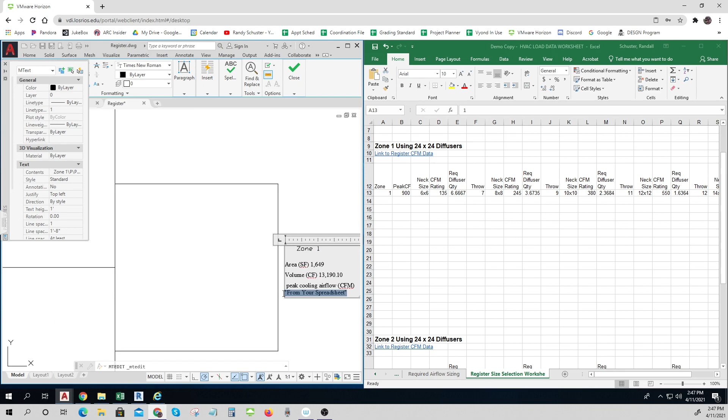Let's say I need 900 CFM in here. I know that's not quite right, not according to our calculations, but you'll have to put in your number properly. So with 900, if I use a 6x6 register, I'll get 135 per unit. I'll need 6.7, so I'll need 7 of those, and they'll have a throw of 7 feet.

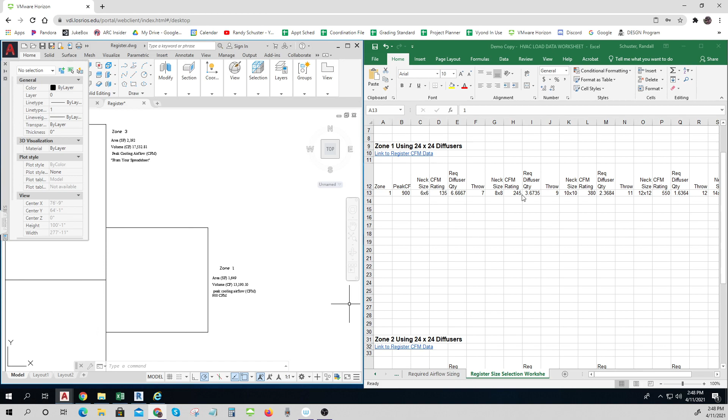But maybe I want to try to get away with fewer. If I did 4 of them, I'd have a little bit more air than I needed. With an 8x8 neck, each one is 245, and I need 3.6, so if I put 4 of them in there it wouldn't be too bad, and each one has a throw of 9 feet.

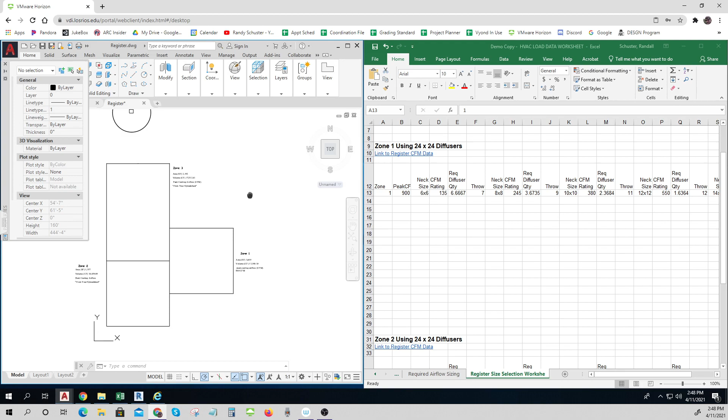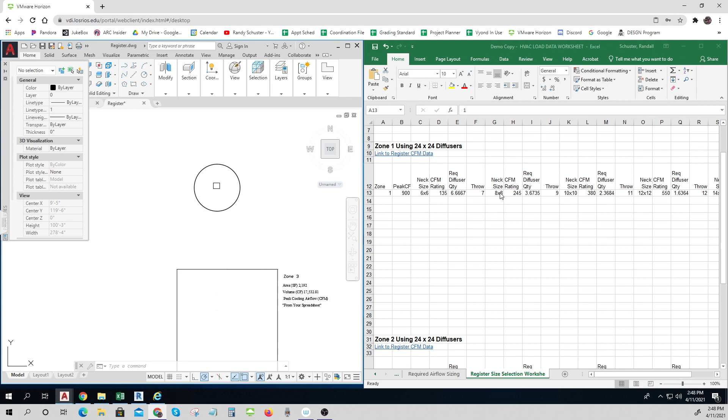So let's see what that'll look like. Here's my register. If I do 4 of those, my throw is 9 feet, and this one has a radius of 12, so I have to make it 9 feet. There, that sort of estimates my 8x8. So I'm going to try it and see how it looks.

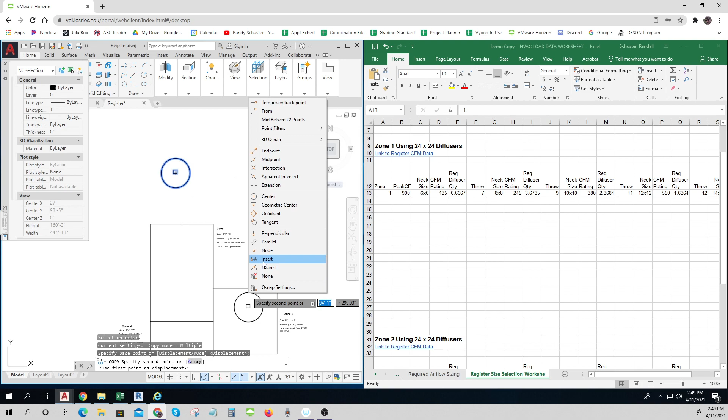I'm going to copy that and I have to have my OSNAP set properly. I need my quadrant on, so I want my quadrant, say, on my midpoint. I have to get my OSNAP set properly here. I'm going to want midpoint, I don't need center, and quadrant, intersection, perpendicular. That'll be a good one.

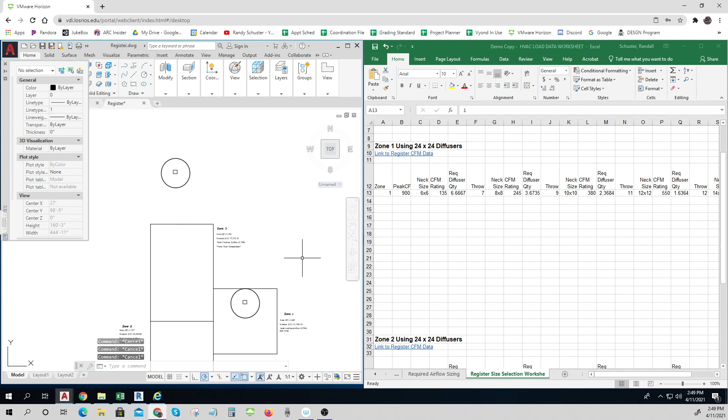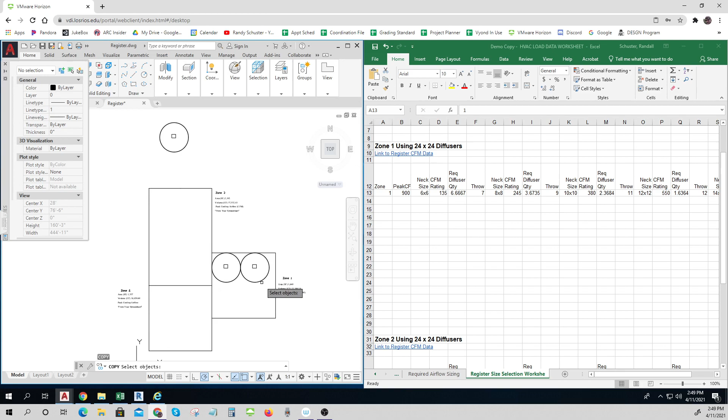I'm going to move this so the quadrant comes over to here. There we go, and supposedly with 4 of those I can get it to work. So I'll copy that one, put the quadrant to the quadrant, and copy those. Put the quadrant... oh no, those aren't quite doing it.

Maybe I'd be better off with 6 or 7 of these with a throw. You see, there's a lot of area here that isn't really getting good coverage. That's not terrible, I'm getting enough air, it'll spread around, but let's see if I can come up with a better solution.

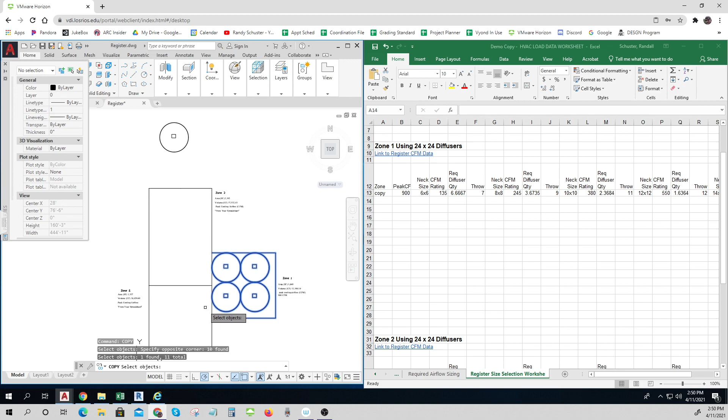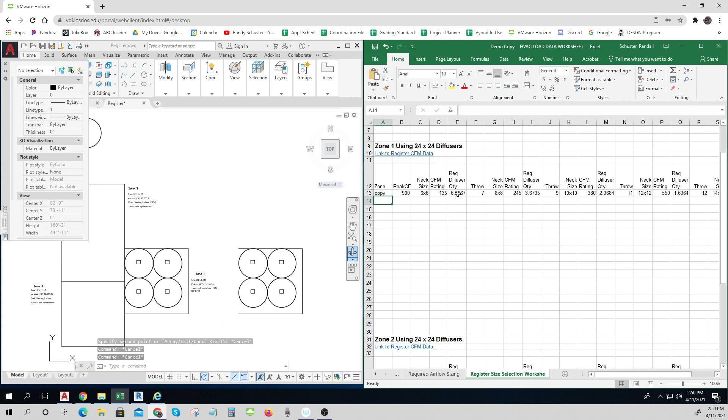So I'm going to make a copy of that for my zone 1 solution, and just see if I can do better than that. Another choice would be 6 or 7 of these with the 6x6, and they've got a throw of 7.

So if I change these all to... I'm going to change this one now to a throw of 7 feet, 7 feet. Get that to move and see if I can get that to line up.

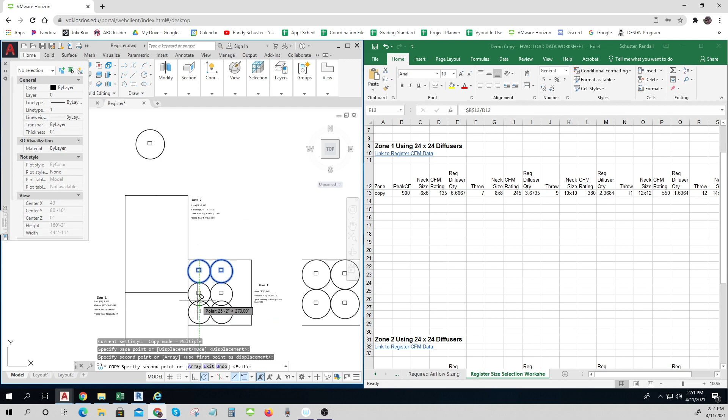Well, that's doing a little bit better. So I might need a few extras. I'm getting a little bit of overlap and a little bit of coverage.

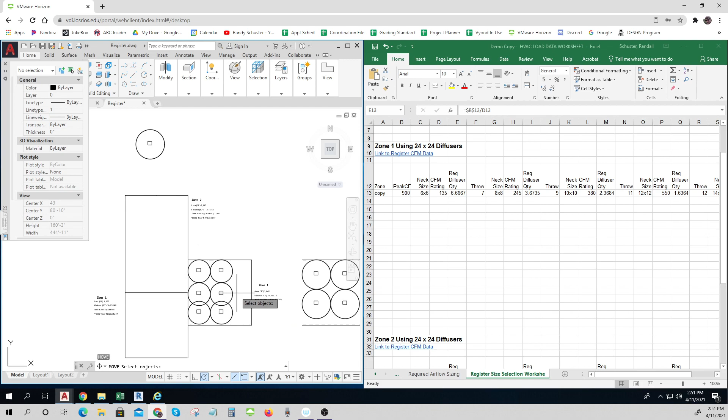So you can see now I'm just trying to come up with my best solution. And then 7 would give me one more, but I'm still not nailing it, so I may be going the wrong way. So that's with 6, I could do 7 or 8.

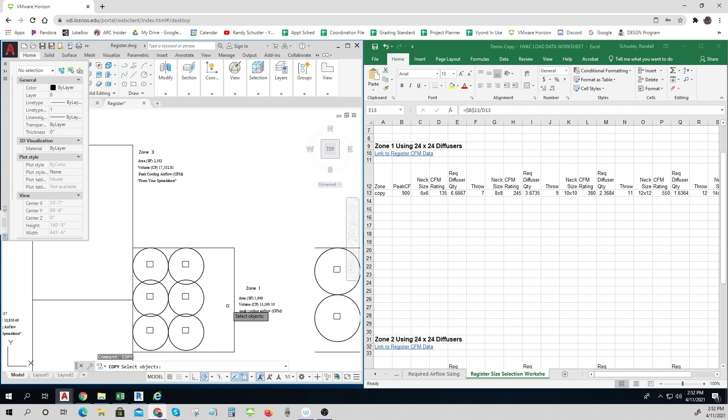You see, I'm not being super precise. Air does move around, so I don't have to be perfect with this, but that's not too bad, and I'd be doing a little bit better, right? So those ones are up. But let's see what happens now — there's another one that I could try.

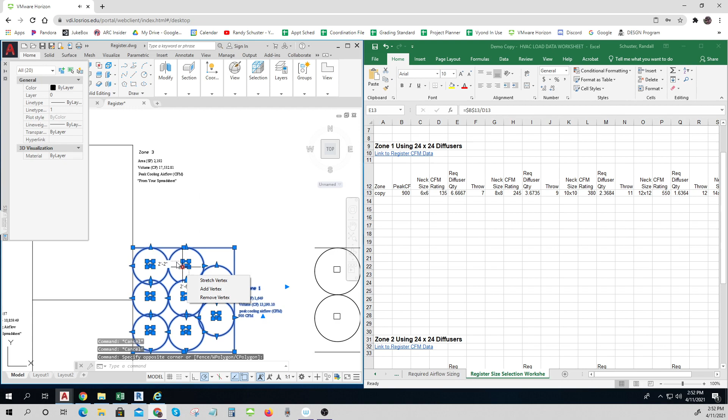So this is what you're going to do. You're going to set how many registers and about where they go.

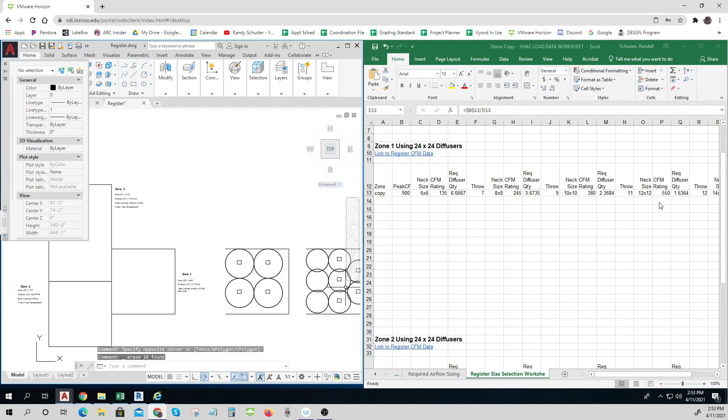Now let me get rid of these again, and I'll try what happens if I go the other way. A 550 has a throw of 12, and I need 1.6, or a 14 has a 750, and I'd still need 2 of them, and it's got a throw of 15. Let me try that.

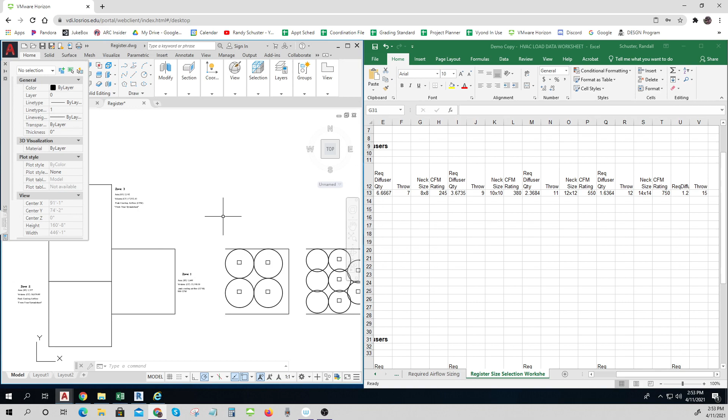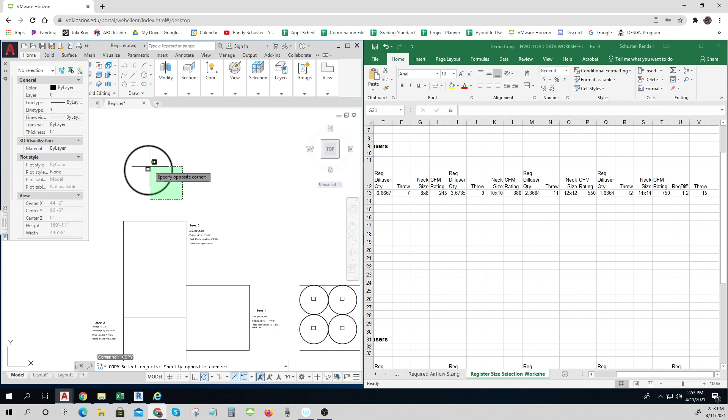Let me try 2 of them with a throw of 15. Oh, that needs to be 15 feet. And that's pretty good, I've got a lot of overlap. Maybe I could even do those with a throw of 12 feet, and it wouldn't be too bad.

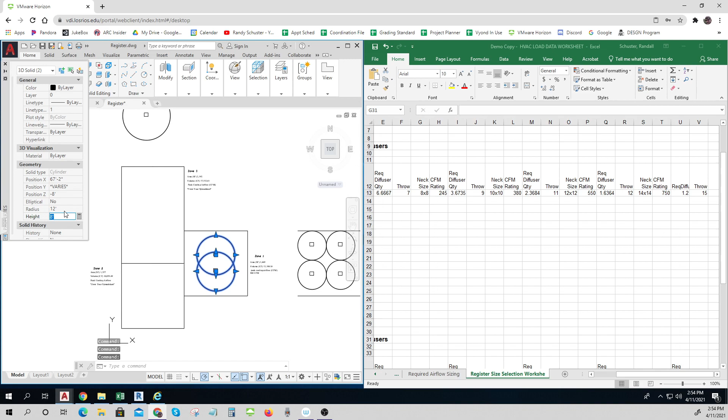And that would tell me about where I'd need to put my registers. Now, this one would need to move up just a little bit, right?

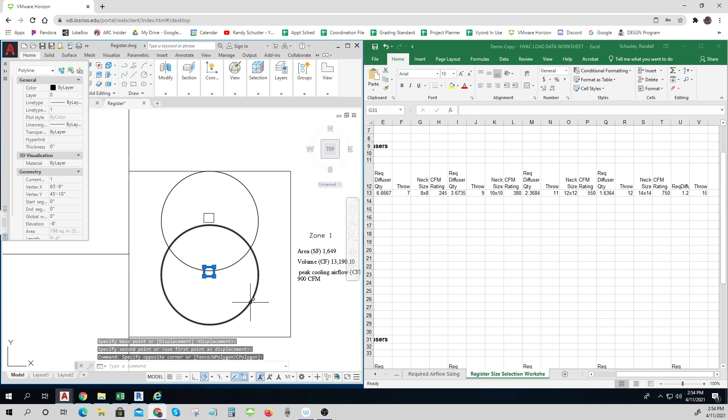So none of these are perfect. And this is one of the things that you'll see, that when you do room design, you start thinking about these ahead of time and go, ooh, okay, maybe I need to make some adjustment to my room size to match these out a little bit more. But this still isn't too bad.

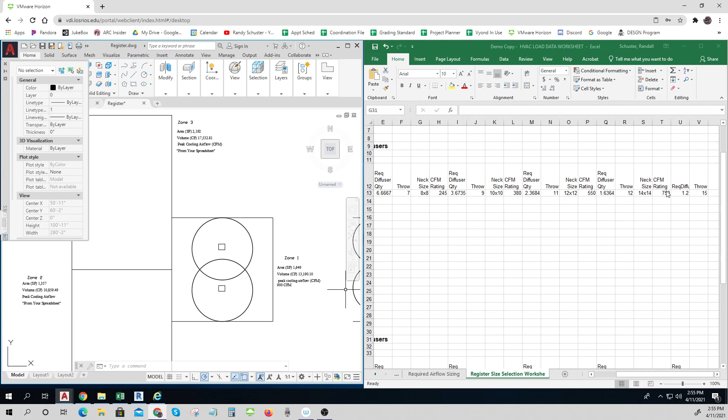I have some minor dead zones that aren't too bad. I could even move these over and put a small one in over here if I wanted to get a little bit more in this little room over here. Okay, but this is using a little bit more than the size of the air handler unit, but it'll be okay. So you're gonna do your best to do these.

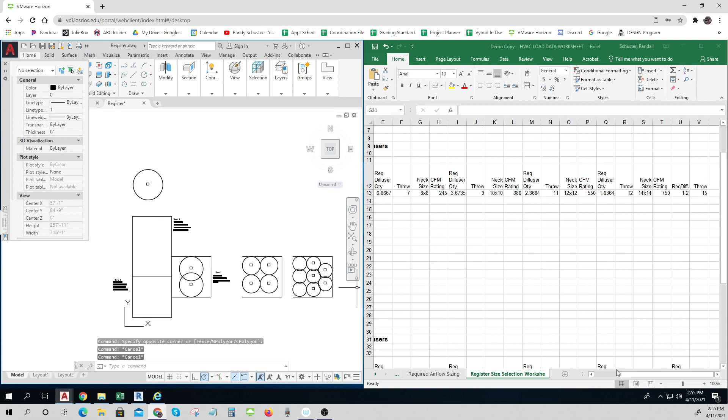Now, which one of these is the best? This one probably gives me my best air distribution, and it's the closest to the actual size that I'm looking for. And so this one might be the best one.

Now, the other thing you could do is say, hey, I don't like that register company. I want one that has a little bit better throw and a little bit more efficiency. And you could actually look for registers that do better.

But for what we're doing, here's what I want you to do. I want you to take each room, go back to your data. This is from last week. Look at your peak CFM, look at how many diffusers there were and the throw, and actually lay out your options.

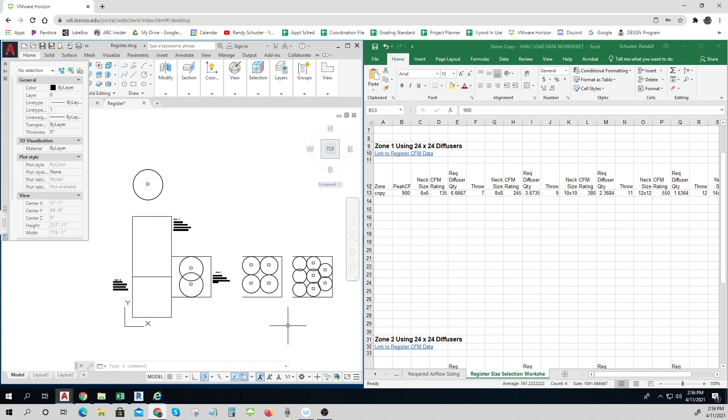And then you're going to choose one to use because you're going to need to do that in the next step where we actually put these in place. Now, as I do my demonstration, mine are going to come out different than yours, possibly, because I'm not going to use the same numbers that you had.

But as an example, I'm going to choose this option. I'm going to put in 7 registers with a 6x6 neck on them. And I'm going to give them each a rating of 135. Okay, and so I'm going to demonstrate that next for zone 1.

And then you'll be able to do that. But so here you go. Here's the summary for you.

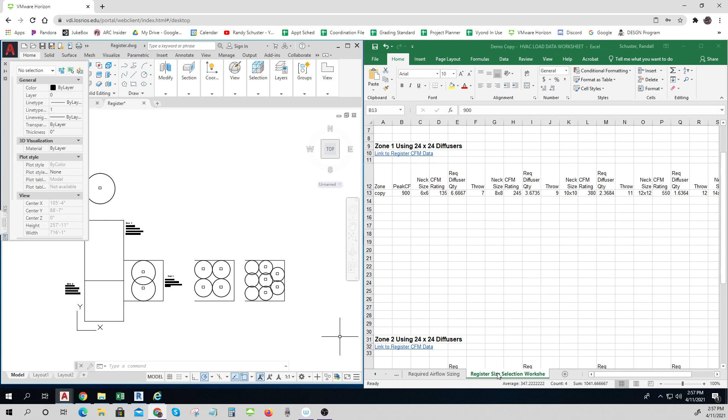Register size selection worksheet tells you the size of the circles that you can put in and how many belong in each area based on your peak CFM that you found last week.

Okay, so you're going to go to your chart, find the peak CFM, figure out how many diffusers you need with each neck size and the throw.

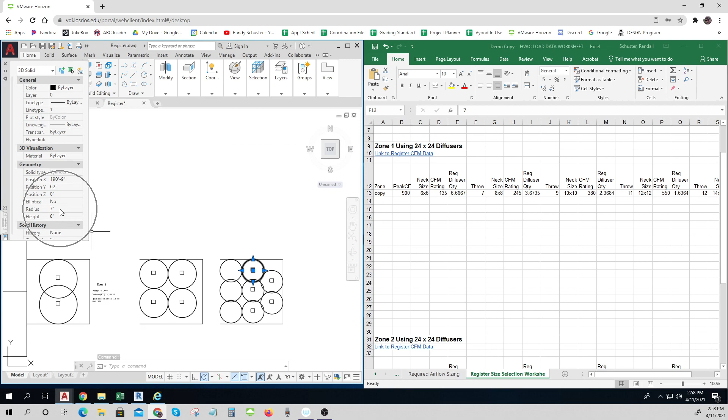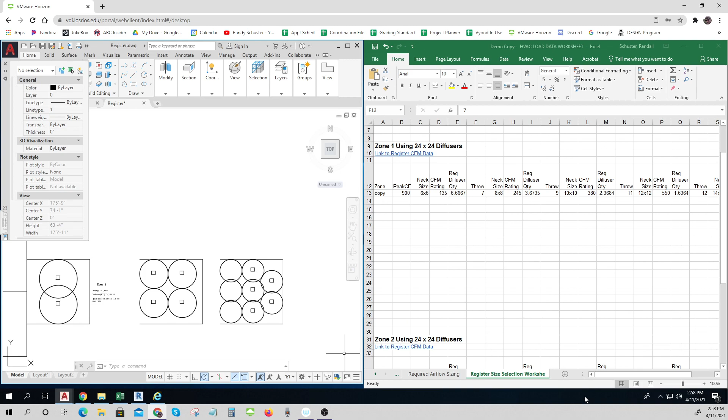Change the circle size to whatever the throw is for your radius and lay them out. Pretty close approximation. This says I need 6.66. I went a little bit higher, I made 8. Okay, so there you go. That's your first step. Lay out your registers.